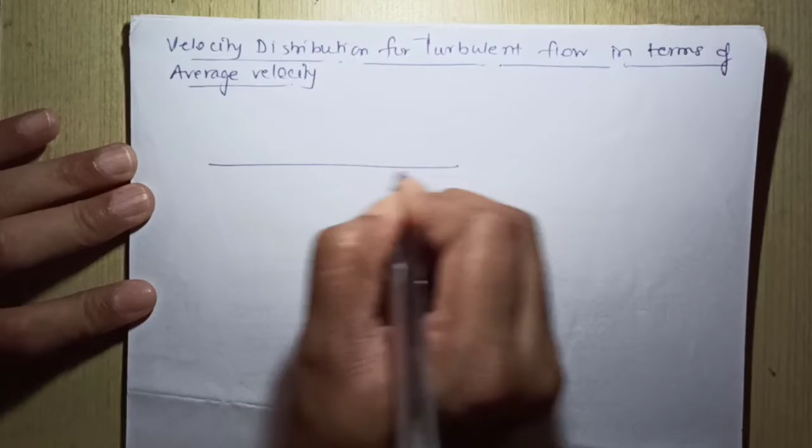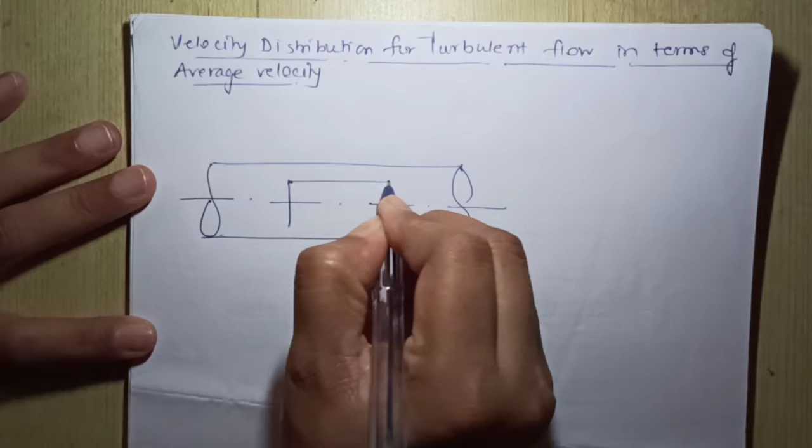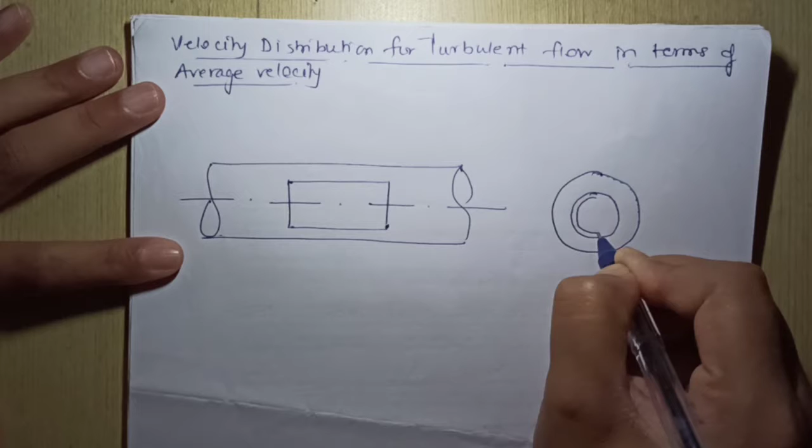So consider a circular pipe, and consider an elemental ring within it of thickness dr. If you project it in front view, you can see the ring thickness dr, and the radius of the ring is small r, and radius of the pipe is capital R.

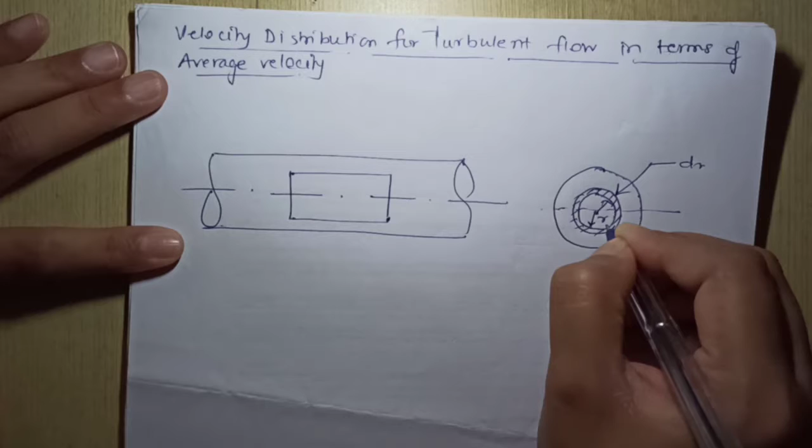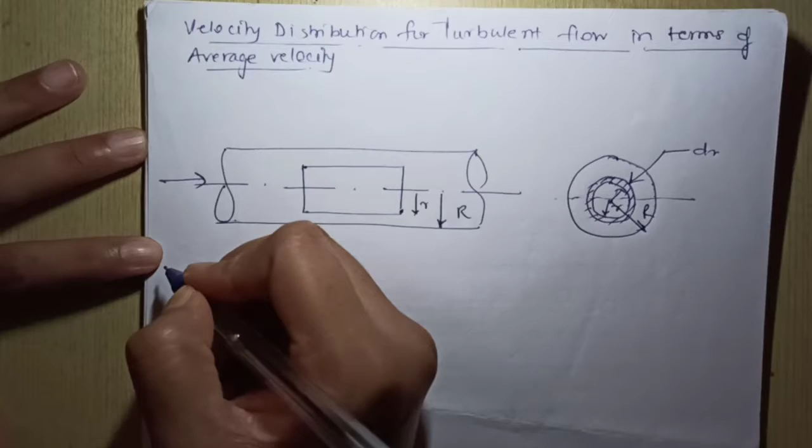Flow is happening, turbulent flow is happening from left to right. Okay, so now usually Q is given by area into average velocity across the cross section of the pipe, that is area into pi r square into u bar.

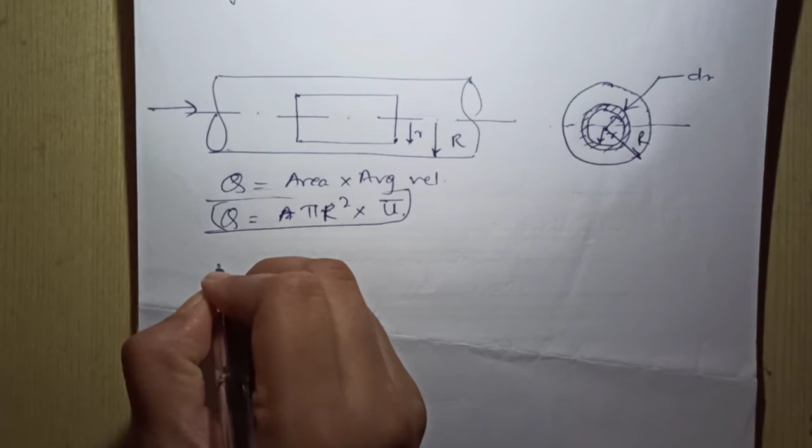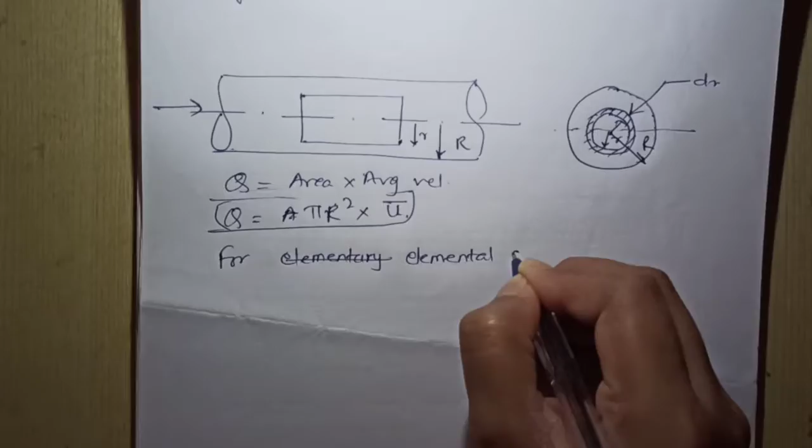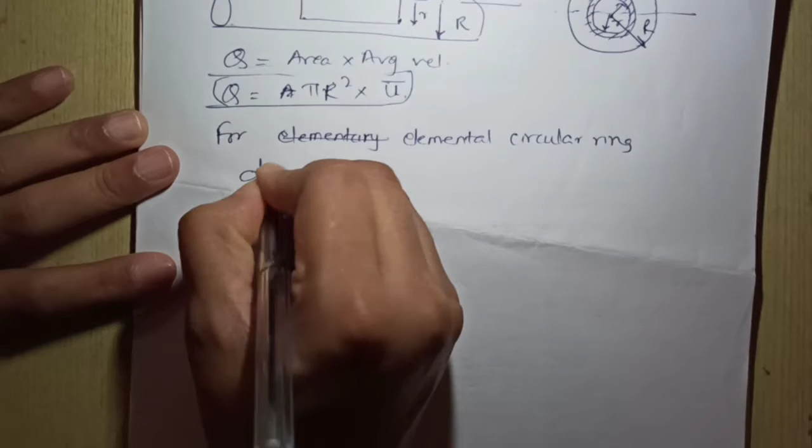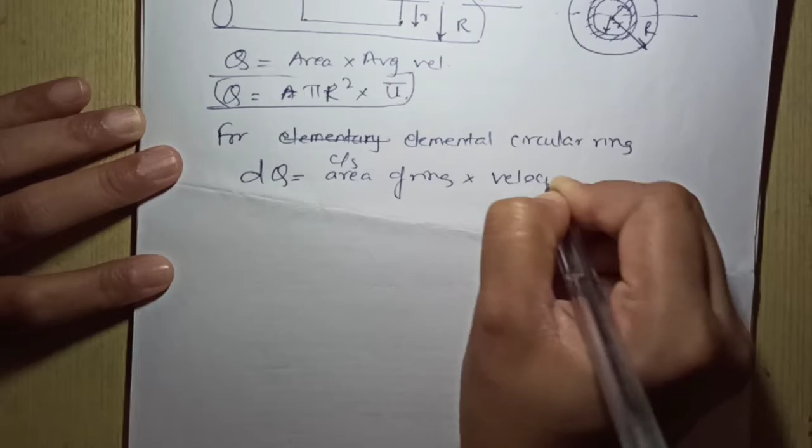Okay, so for elemental circular ring, your dq is given by discharge through the elemental ring of thickness dr, which is area, cross section area of ring into velocity. It is given by 2 pi r, that is the circumference of the ring, into thickness of the ring, into u.

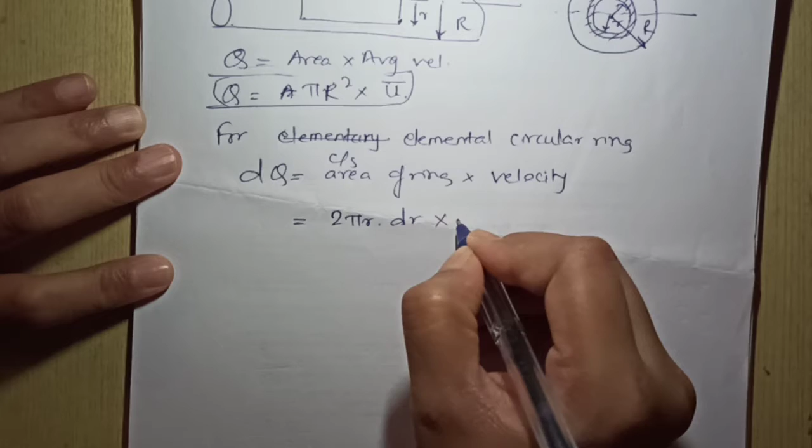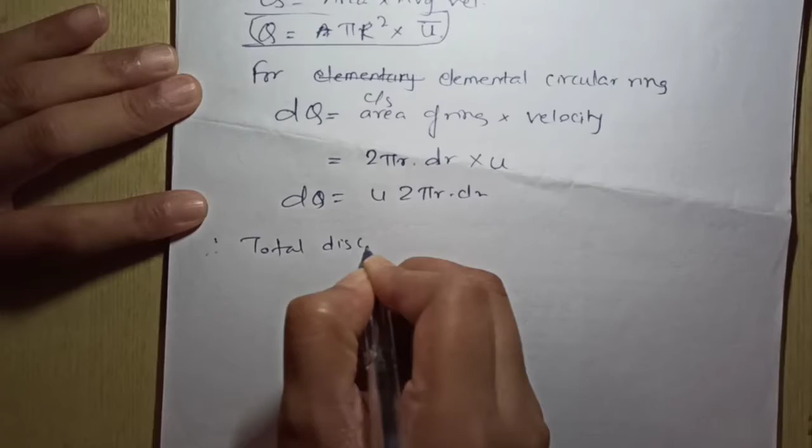So it is u 2 pi r dr, dq is equal to, therefore total discharge q is equal to integration of dq, is equal to integration of u into 2 pi r dr. Okay.

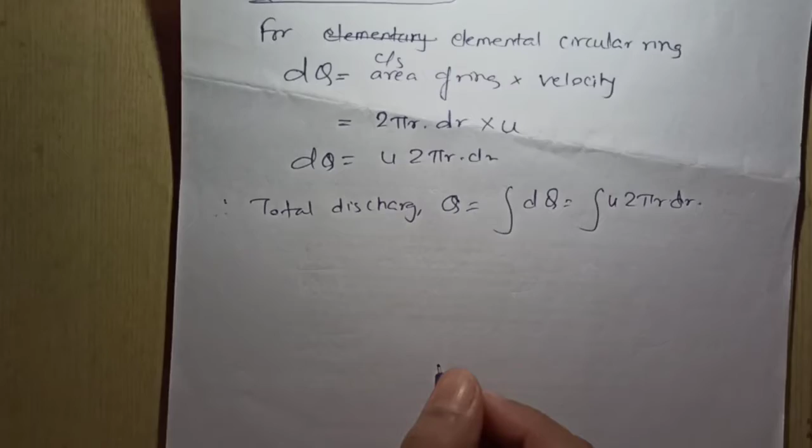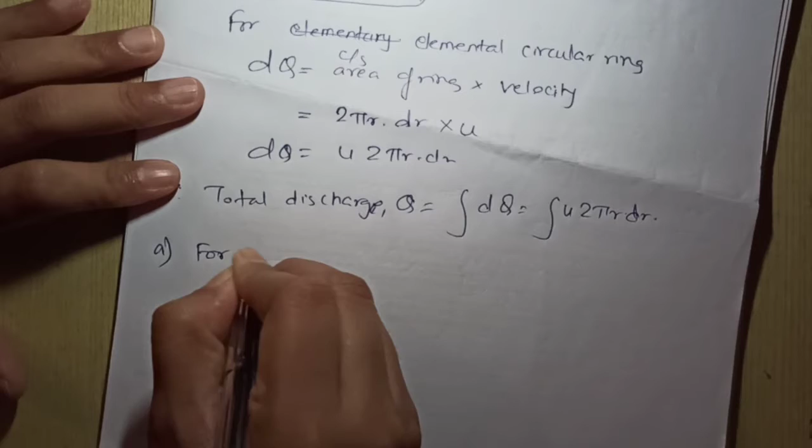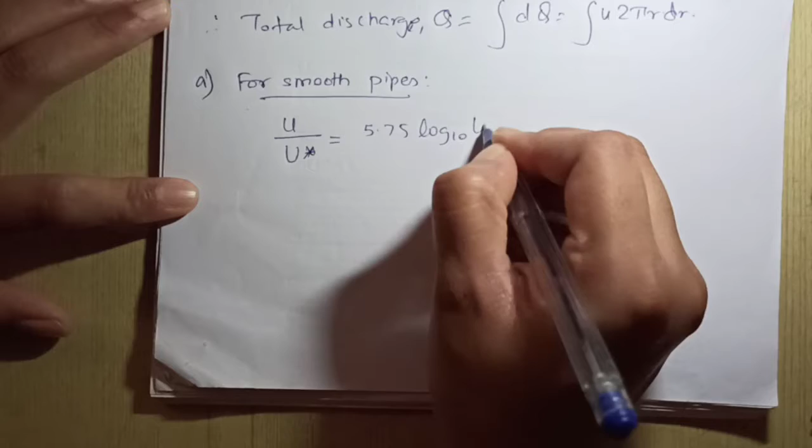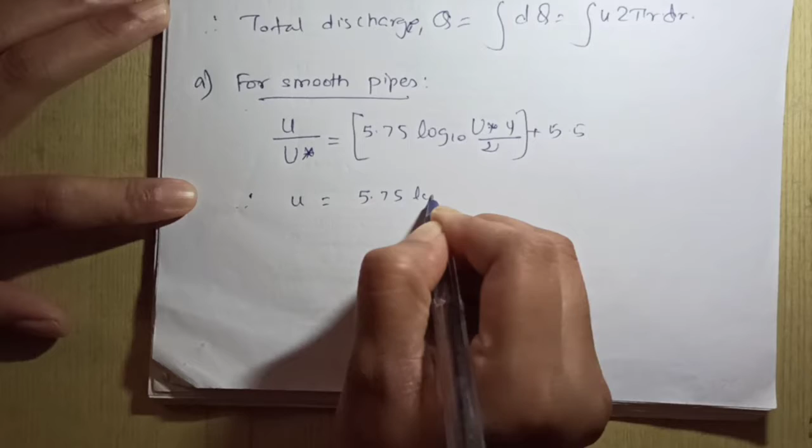Now further, in case of smooth pipes, the velocity distribution is given as u upon u star is equal to 5.75 log to the base 10 of u star into y upon nu plus 5.5.

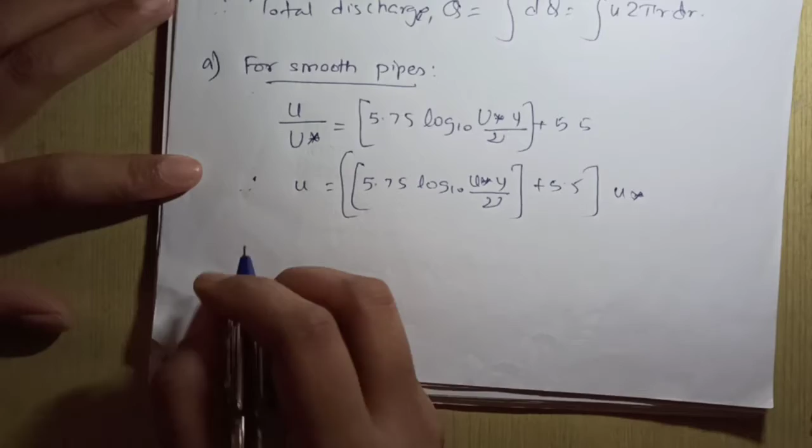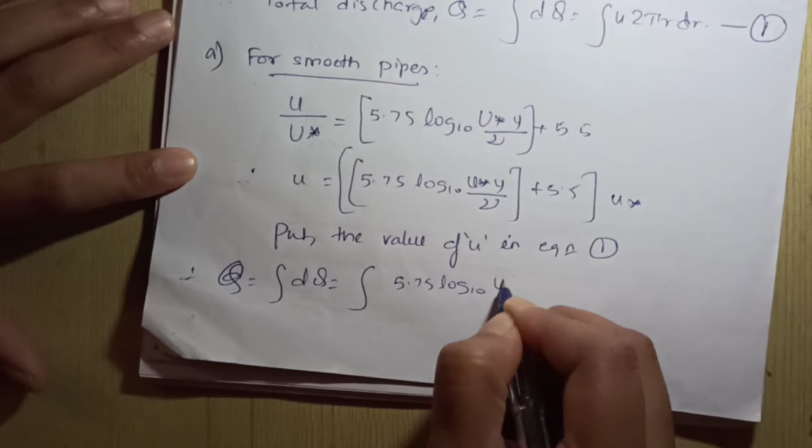Therefore you can write u is equal to 5.75 log to the base 10 u star into y upon nu plus 5.5, into bracket u star. Now substitute this, mark this as equation 1, put the value of u in equation 1. Therefore q is equal to integration of dq, is equal to integration of 5.75 log to the base 10 u star y upon nu plus 5.5 into u star into 2 pi r into dr.

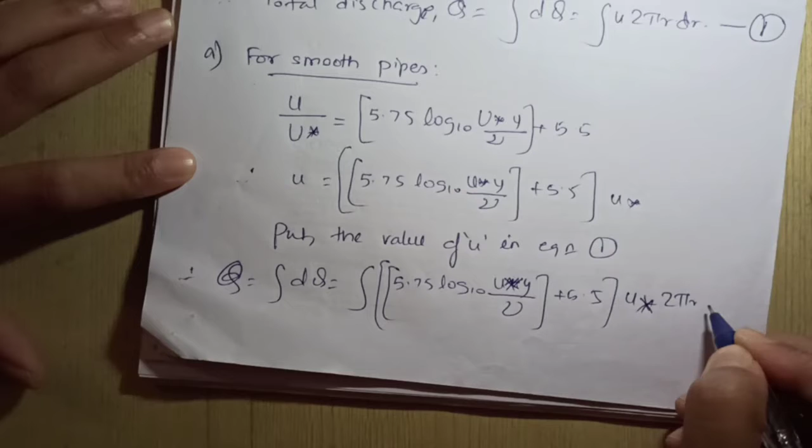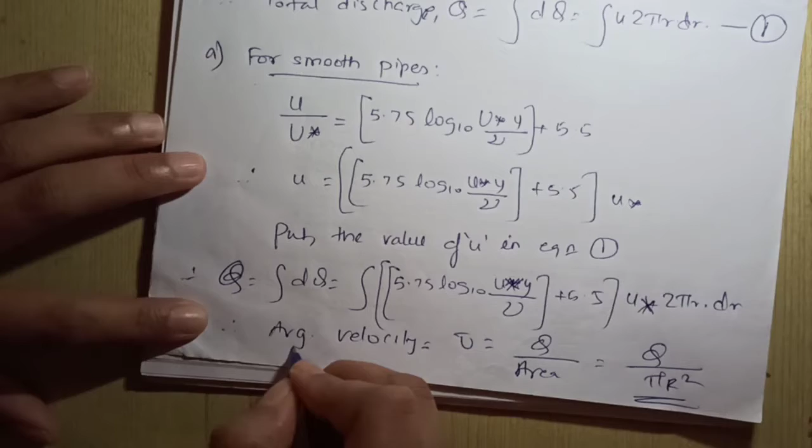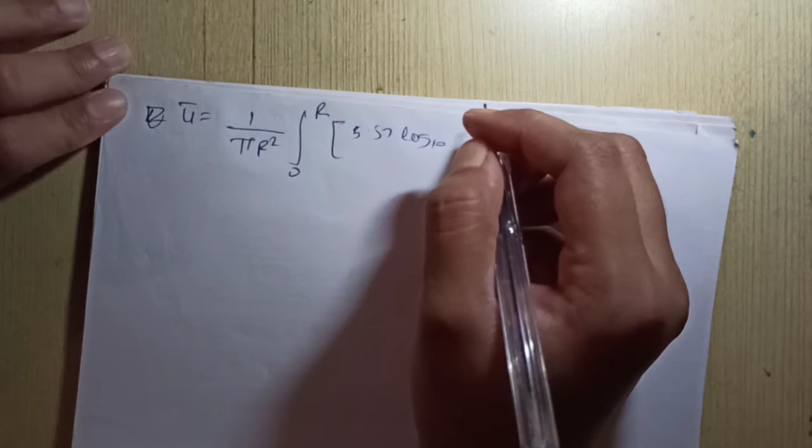Now as average velocity u bar is equal to q upon area, that is q upon pi r square for circular pipe. So we can write u bar is equal to 1 upon pi r square into integration from 0 to r of 5.75 log to the base 10 u star into y upon nu plus 5.5 into u star into 2 pi r dr.

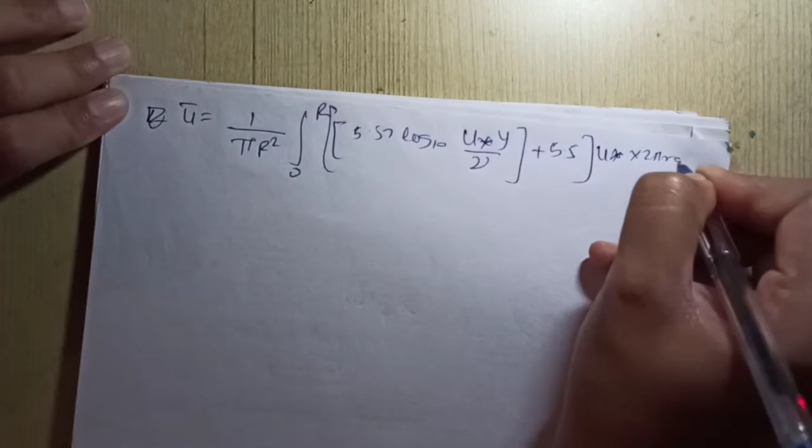Now y is equal to capital R minus small r, which is given as this distance y. Okay. Therefore your average velocity becomes equal to 1 upon pi r square. Inside integration we have 5.75 log to the base 10 u star into capital R minus small r upon nu plus 5.5 into u star into 2 pi r dr.

Now, further simplification and integration of the expression will give you the final expression as u bar upon u star is equal to 5.75 log to the base 10 u star into capital R upon nu plus 1.75. So this is the expression for average velocity distribution in terms of average velocity for smooth pipes.

Next, for rough pipes, we have velocity given as u upon u star is equal to 5.75 log to the base 10 into y upon k plus 8.5. This is already derived.

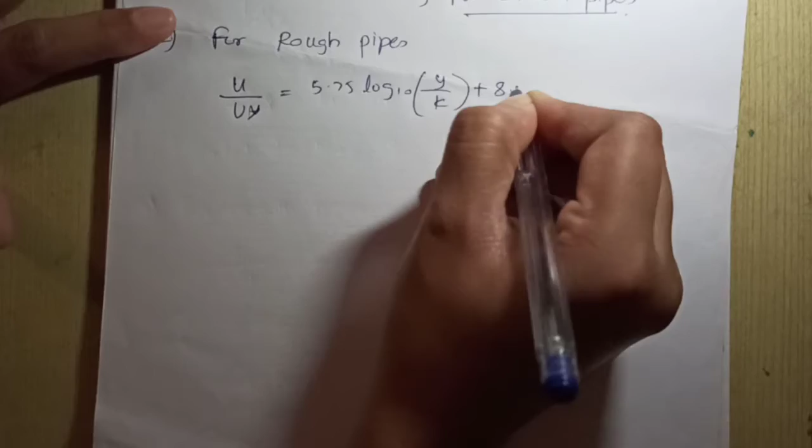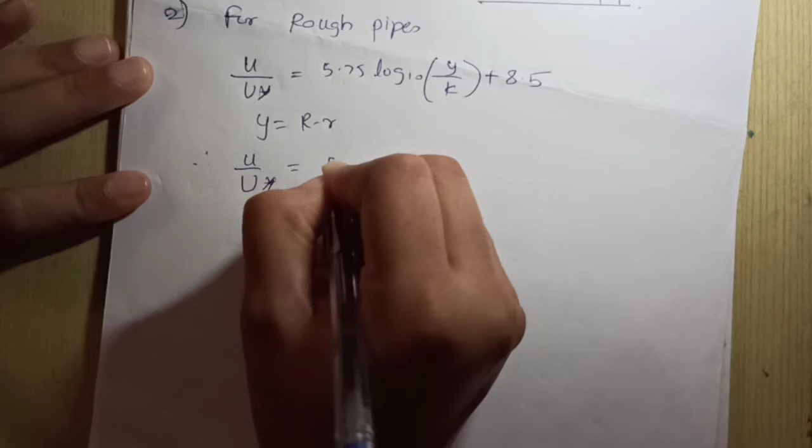Now we have to convert this equation in terms of average velocity. Y is equal to capital R minus small r. Therefore u upon u star is equal to 5.75 log to the base 10 of capital R minus small r upon k plus 8.5.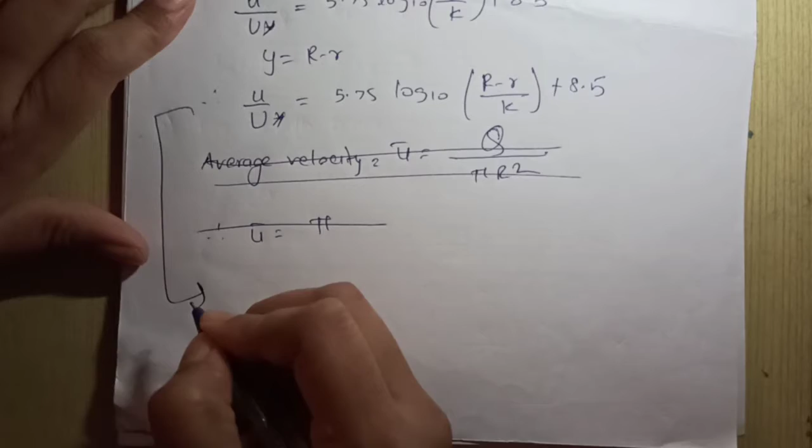Average velocity u bar is equal to q upon pi r square. Therefore u bar is equal to, from this equation, u upon u star is equal to 5.75 log to the base 10 capital R minus small r upon k plus 8.5, into u star.

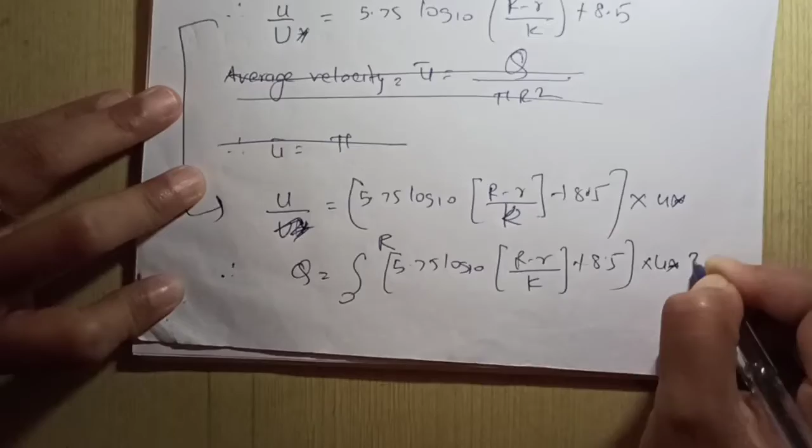Therefore q is equal to integration of 5.75 log to the base 10 of capital R minus small r upon k plus 8.5, into u star, into 2 pi r dr. This is your q.

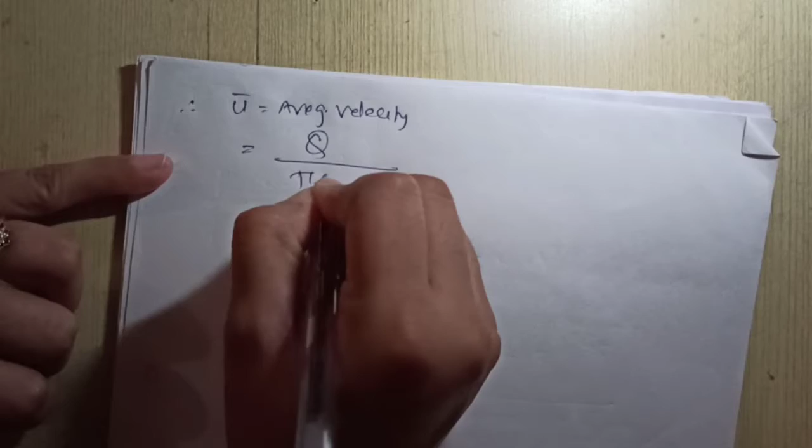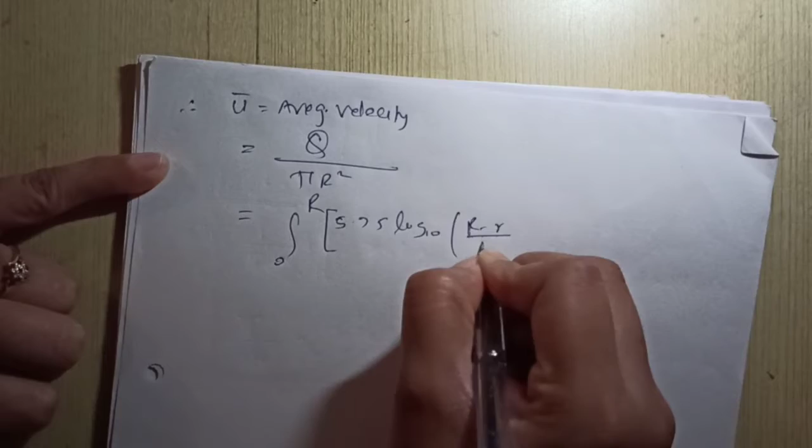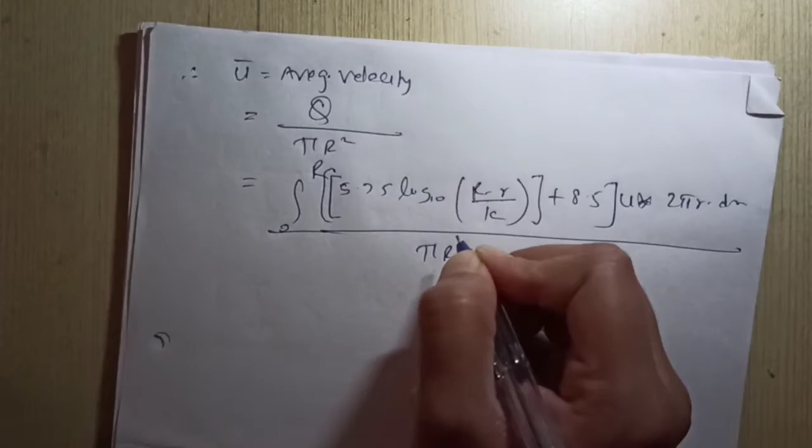Therefore your u bar, that is average velocity, is equal to q upon pi r square, that is equal to 5.75 log to the base 10 into r minus r upon k plus 8.5 into u star into 2 pi r dr upon pi r square. Further integration and simplification will give you an equation, that is u bar upon u star is equal to 5.75 log to the base 10 r upon k plus 4.75. So this is the velocity distribution for rough pipes in turbulent flow in terms of average velocity.

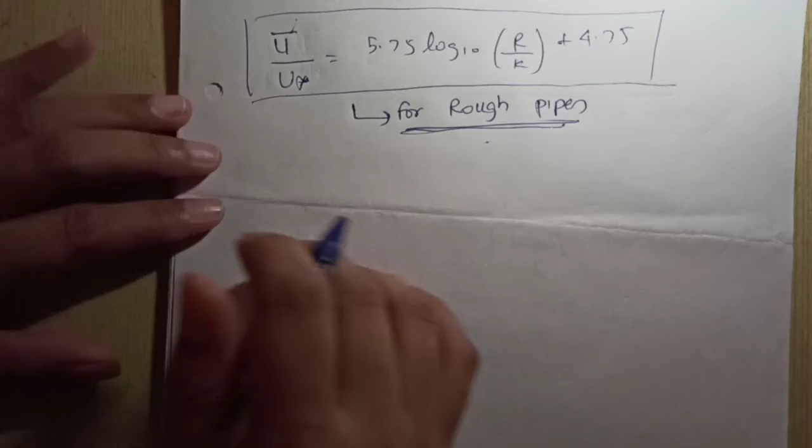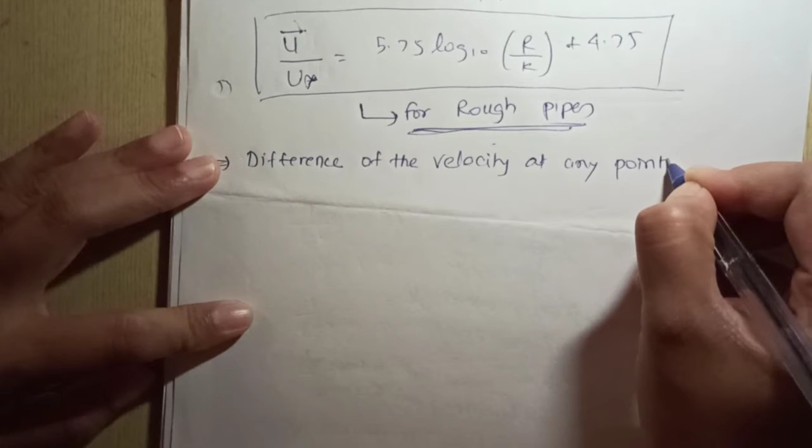Okay. Now after this derivation, let us see some other expressions like the difference of the velocity at any point and average velocity for smooth and rough pipes. So they have asked you to find out the difference between the local velocity and average velocity for smooth and rough pipes.

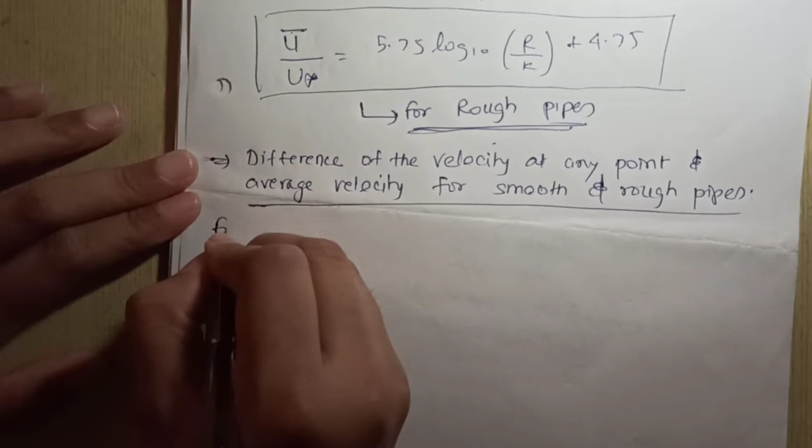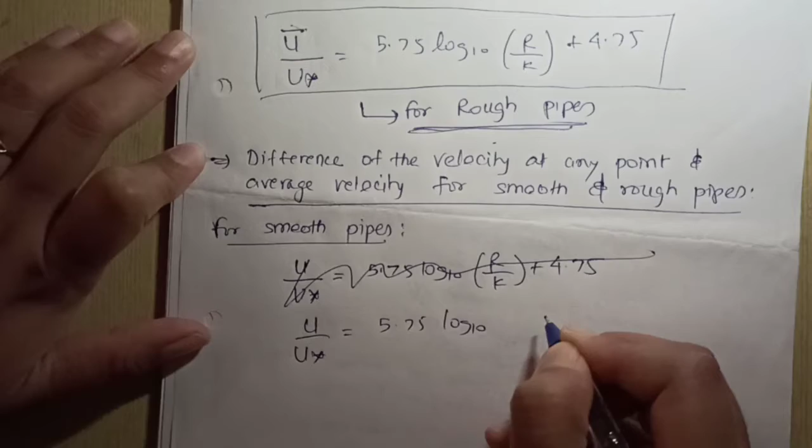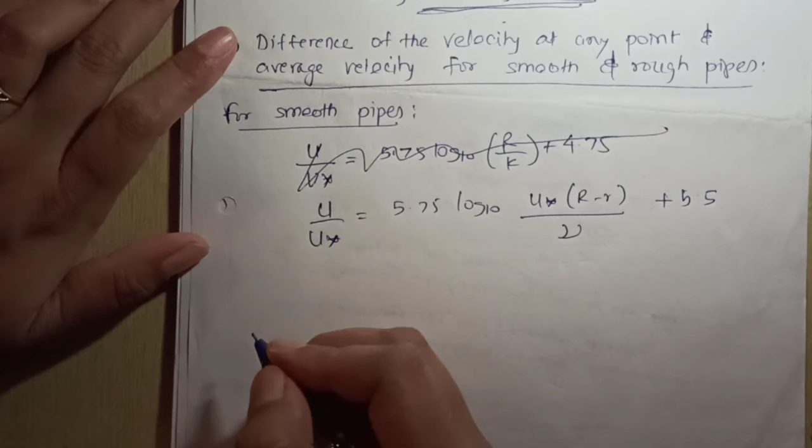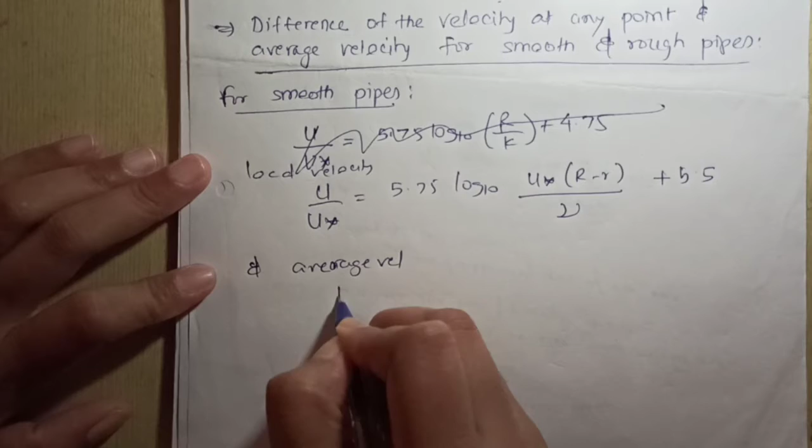So for smooth pipes, for turbulent flow, we have equation u upon u star is equal to 5.75 log to the base 10 r upon k plus 4.75, as we have the equation: u upon u star is equal to 5.75 log to the base 10 u star into r minus small r upon nu plus 5.5. This is local velocity. Average velocity is equal to u bar upon u star is equal to 5.75 log to the base 10 u star into r upon nu plus 1.75.

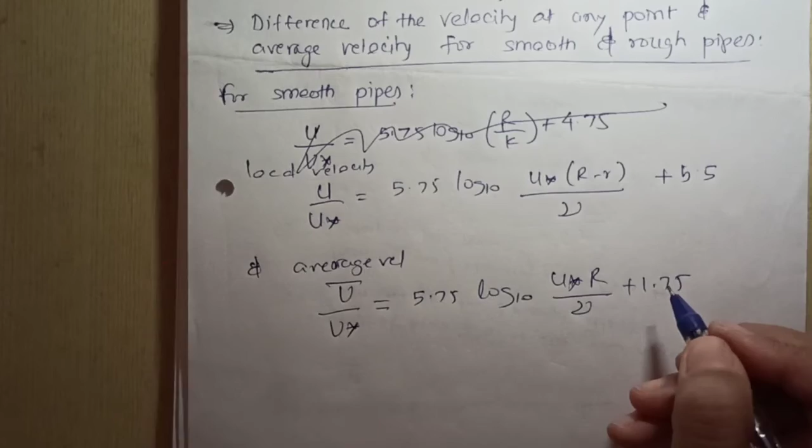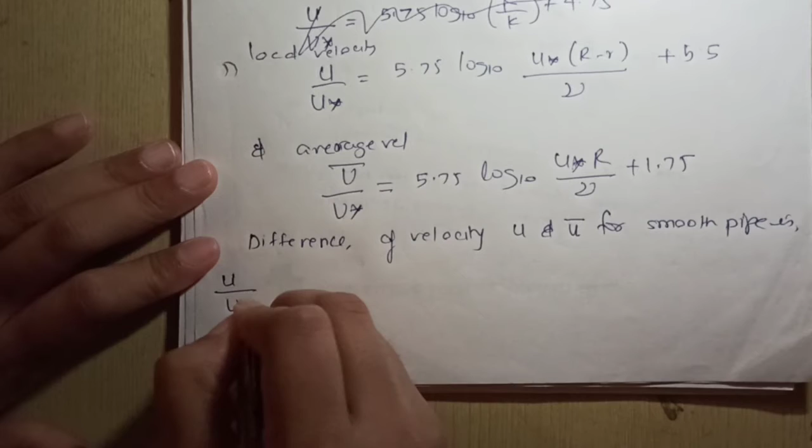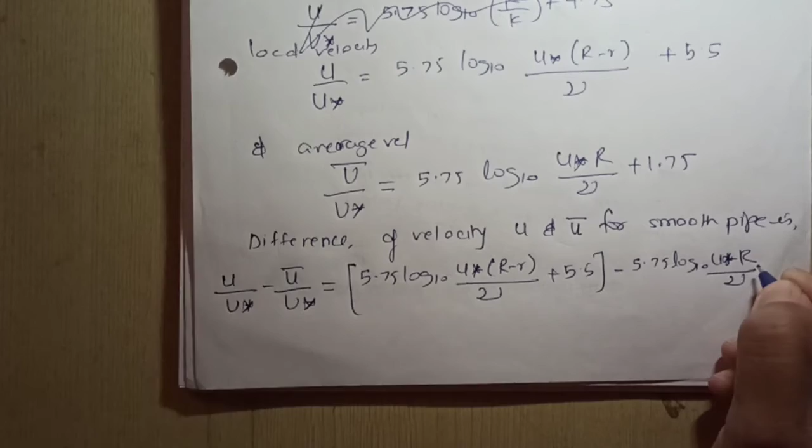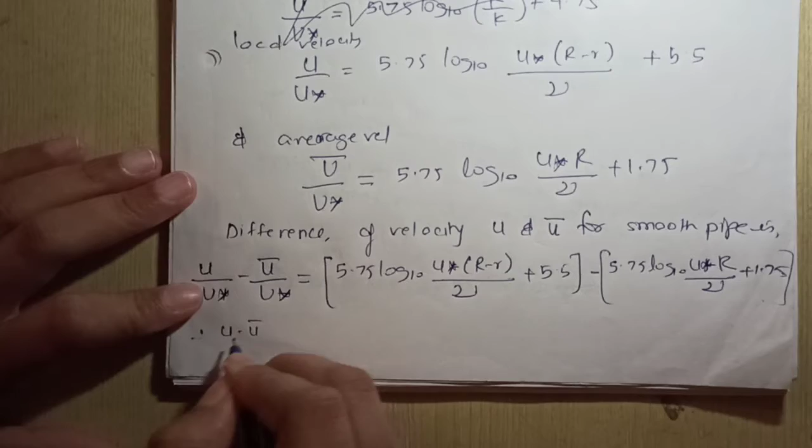Difference of velocity u and u bar for smooth pipe is u upon u star minus u bar upon u star is equal to 5.75 log to the base 10 u star into r minus small r upon nu plus 5.5 minus 5.75 log to the base 10 u star into r upon nu plus 1.75. Therefore u minus u bar upon u star is equal to 5.75 into log to the base 10 into u star into r minus r upon nu minus log to the base 10 u star into r upon nu plus 5.5 minus 1.75.

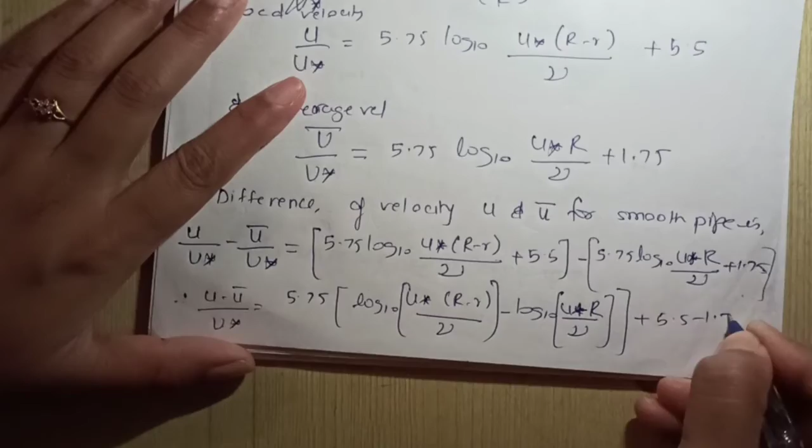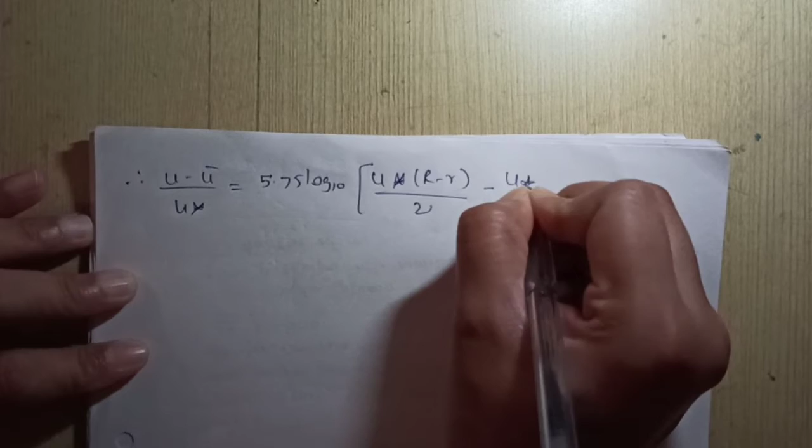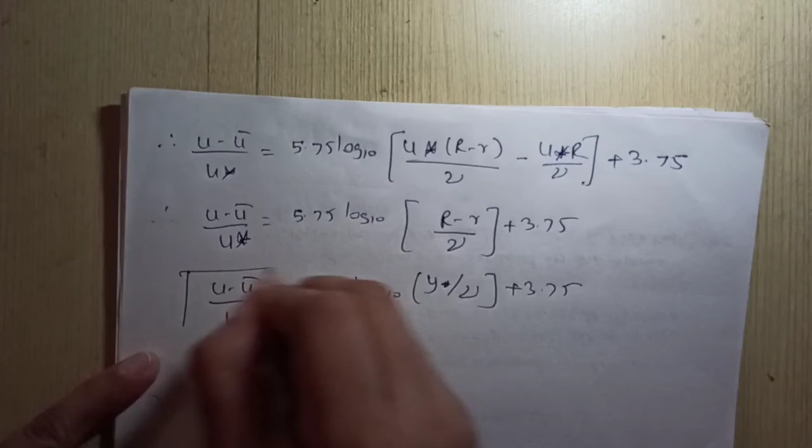Therefore u minus u bar upon u star is equal to 5.75 log to the base 10 of u star into r minus r upon nu minus u star into capital R upon nu plus 3.75. Therefore u minus u bar upon u star is equal to 5.75 log to the base 10 of r minus r upon nu plus 3.75, which is equal to 5.75 log to the base 10 y upon nu plus 3.75, as y is equal to capital R minus small r. So that is the expression for the difference between local velocity and average velocity for smooth pipes.

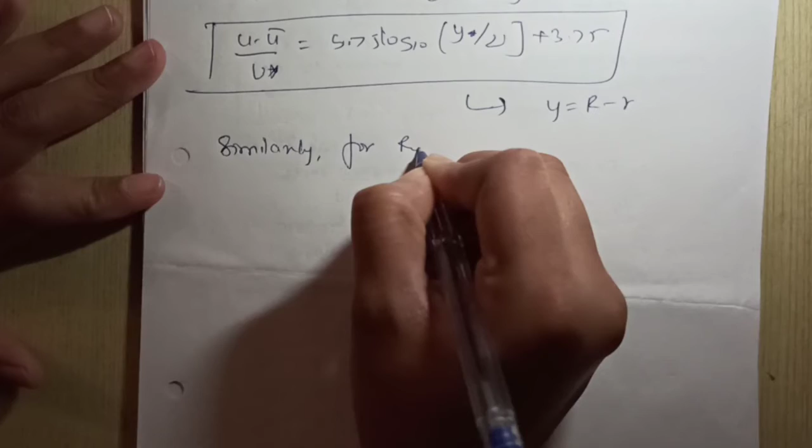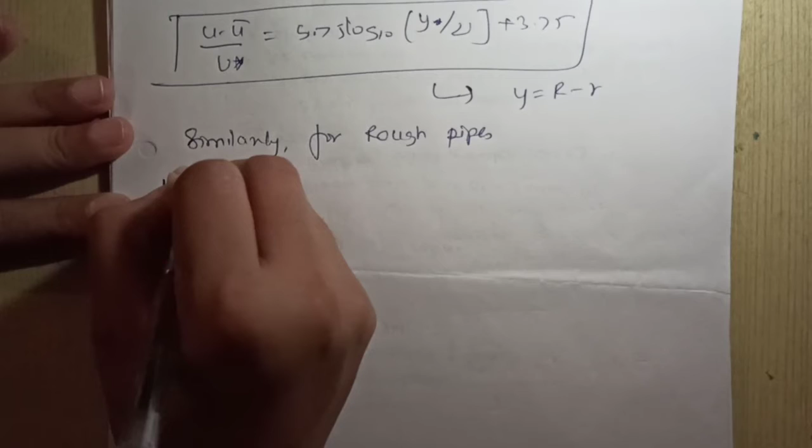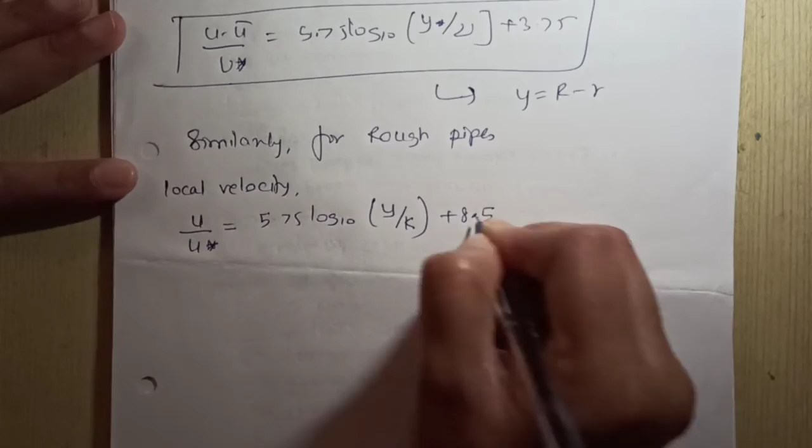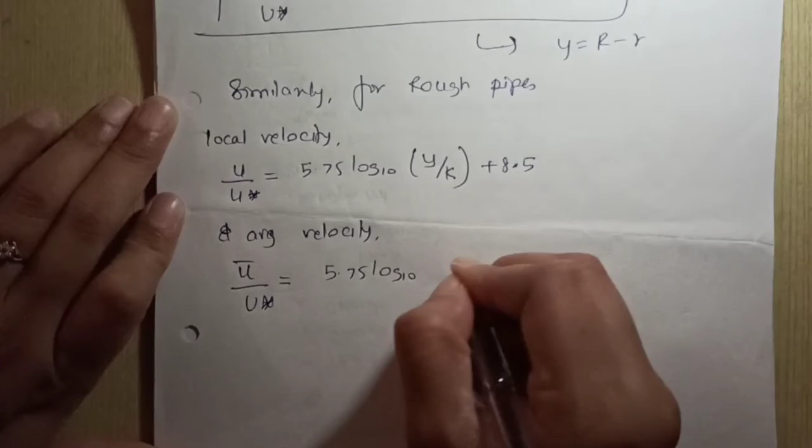Similarly, for rough pipes, your local velocity is given as u upon u star is equal to 5.75 log to the base 10 into y upon k plus 8.5. And average velocity is given by u bar upon u star is equal to 5.75 log to the base 10 of r upon k plus 4.75.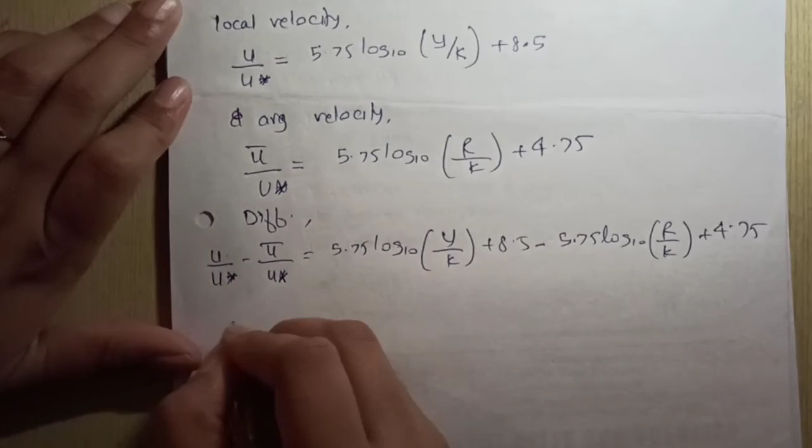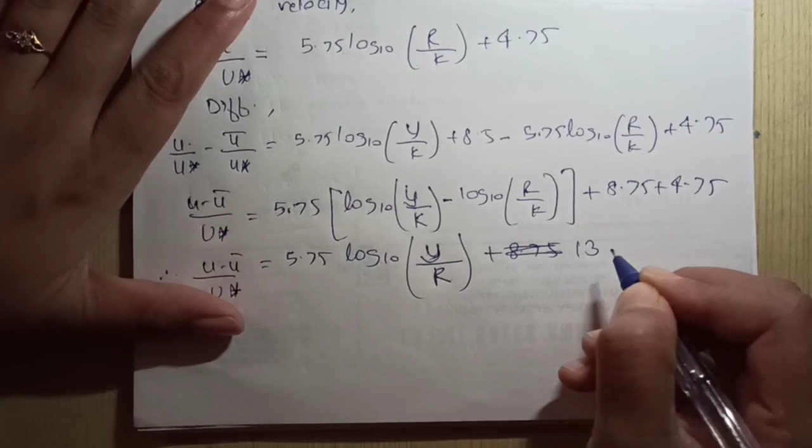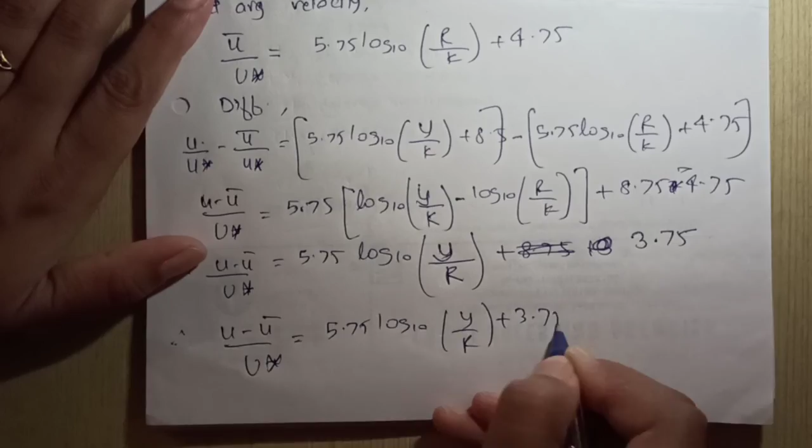Difference: u upon u star minus u bar upon u star is equal to 5.75 log to the base 10 of y upon k plus 8.5 minus 5.75 log to the base 10 r upon k plus 4.75. So u minus u bar upon u star is equal to 5.75 into log to the base 10 y upon k minus log to the base 10 r upon k plus 8.5 minus 4.75... wait, this becomes plus 3.75. Therefore u minus u bar upon u star is equal to 5.75 log to the base 10 y upon r plus 3.75.